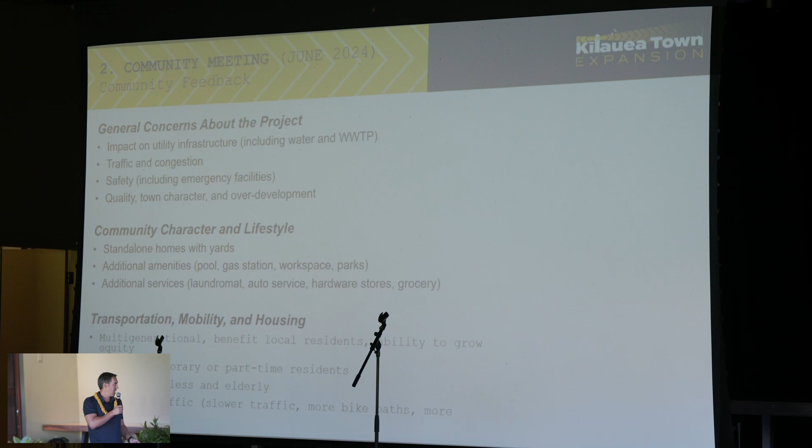So during the meetings, we always want to get some sort of feedback. Meeting number 1 was about getting a lot of feedback — what you guys wanted, what your vision was, so we could start developing concept plans. Some of the notes that came out of those comments are as follows: general concerns about infrastructure — water, wastewater, traffic, safety, and the character of the community. You want the community's character preserved, so whatever is built has to still fit with what's existing. And the last one, of course, transportation and mobility — multi-generational, how to get around without driving, walking, biking, improving traffic, slowing driving down, allowing for better pedestrian and multi-use access.

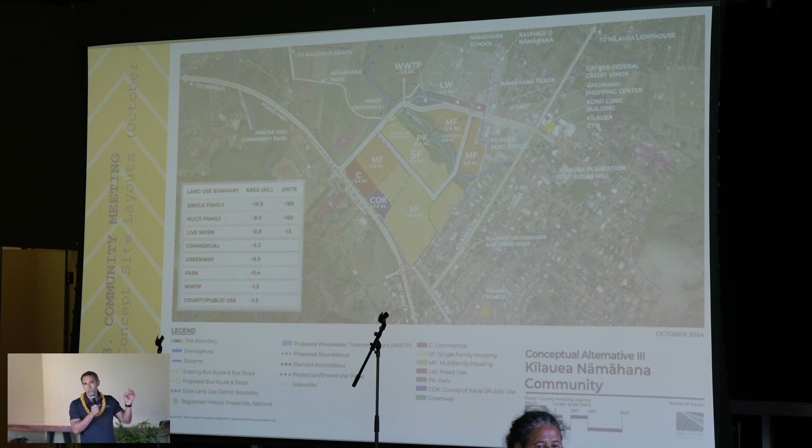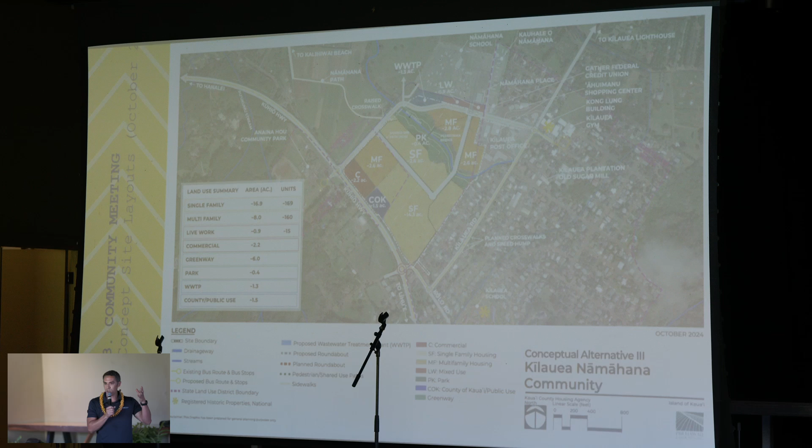There was a lot of feedback on these plans. Particularly, no one really liked commercial or light industry along the highway—they wanted it more focused towards the central core. That was worked out. The treatment plant, again, the concern was proximity to the school, proximity to residents and multifamily, and wind direction. So that was worked out.

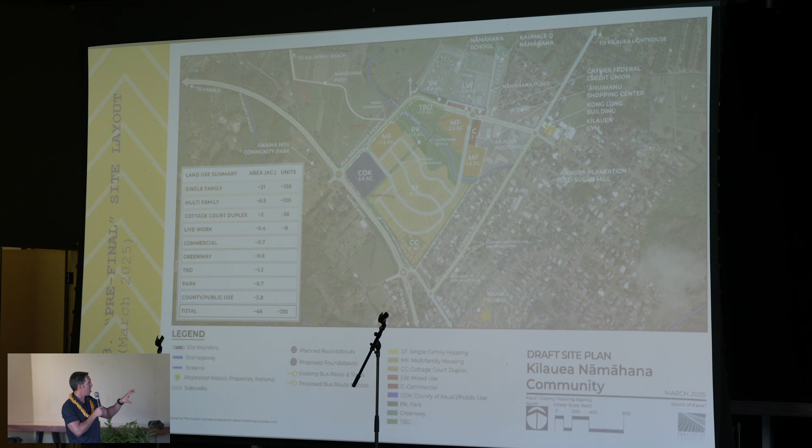Last meeting, in March, the county was saying it could be potential to site the wastewater treatment plant there, and if space allowed, a potential fire station. We'll present on that a little bit later. So this was from March, and again, not too much has changed.

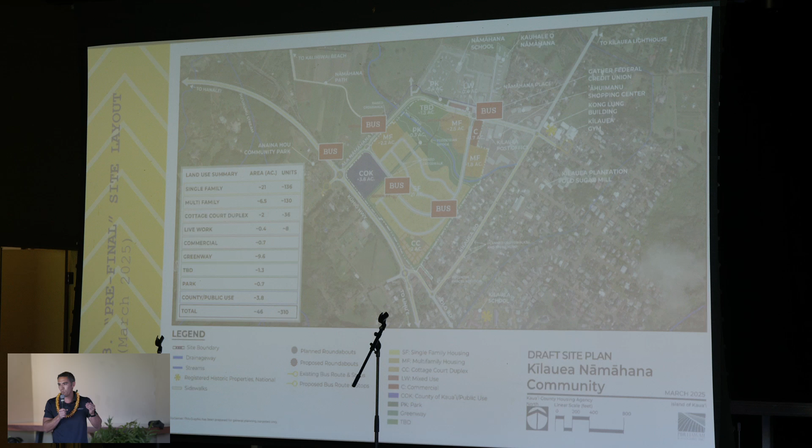We just want to bring us up to speed a little bit as to what was discussed to get feedback from you guys and what it came out to be. There was a need, a demand, for bus stops, so these were bus stops we're hoping to integrate. We'll show those exact spots, which are still options being discussed with DOT and the county to see how it all works out, but bus stops were something that were included, and it's more fixed on our current plan.

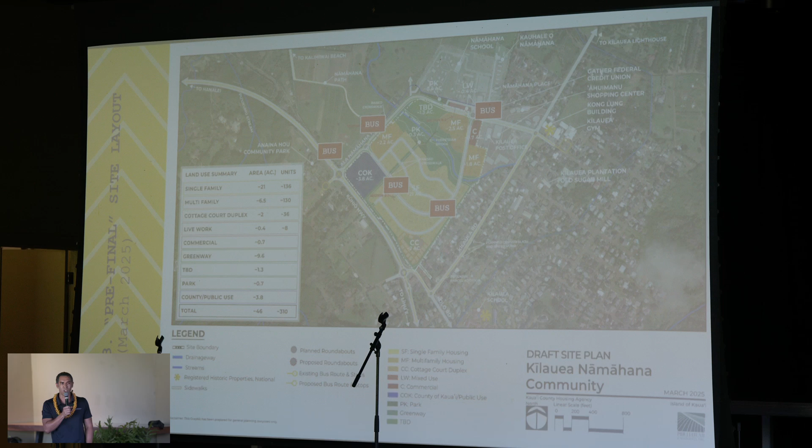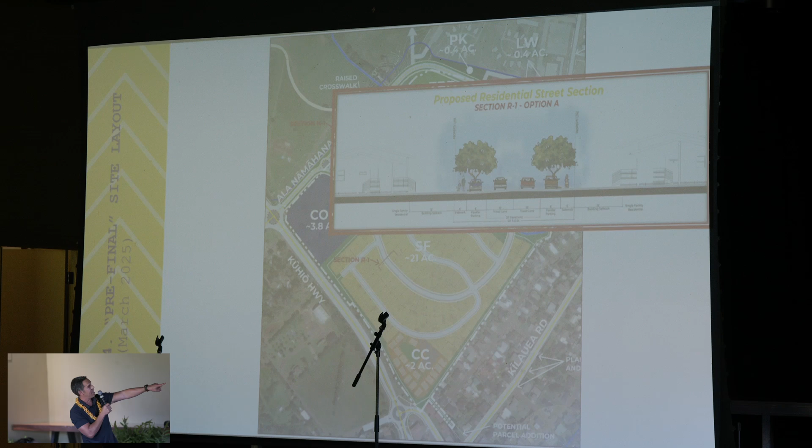So this is a look at the residential, inside the yellow where the single family housing is. There were two options proposed: Option A, traditional curb and gutter with parking, and one with the grass swale, which is more similar to what is currently in Kīlauea Town.

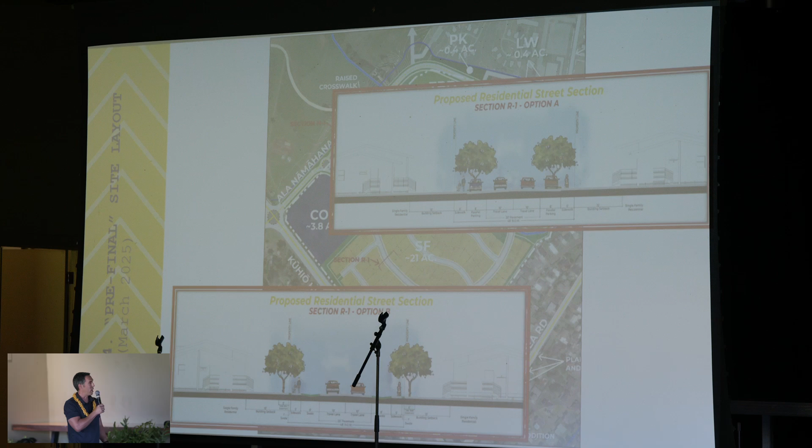So you see the two options: you have parking in the upper right option with the curb and gutter, and there's no parking in the grass swales. So you sort of lose that parking, but you have that grass swale which sort of matches what's currently in town. I'll just tell you the feedback on this was mixed—half the people wanted grass swales, half wanted curb and gutter, and there was a lot of back and forth as to why. We'll present what came out of that a little bit later on.

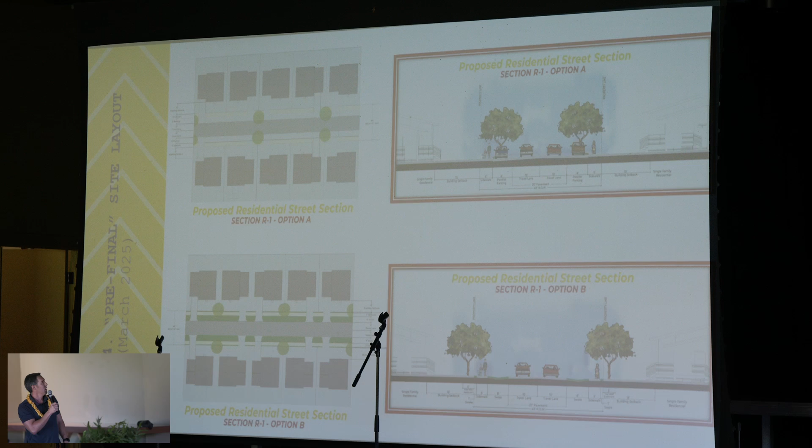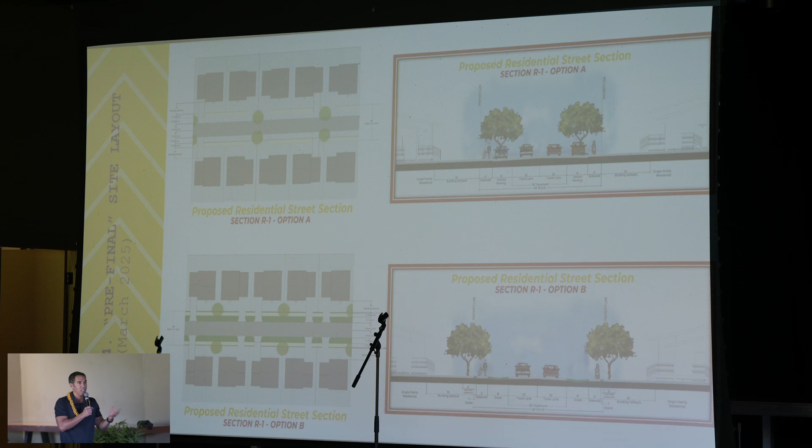So this is another look at it, just so you can see a little more visually. The top one is the curb and gutter, allowing for cars to park within the residential areas along the side, versus the lower option with the grass swales where there is no parking. Some of the concerns the Kauaʻi design team had was if you have the grass swale option, we know a lot of people have extra cars, they're likely to use that area for parking anyway, which rules out the real purpose of the grass swale. When it rains, they go muddy and all messed up.

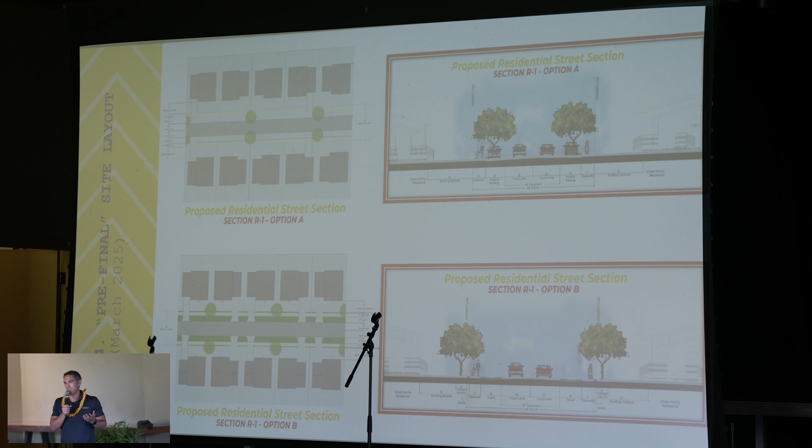So a lot of back and forth. Again, it's very mixed opinions as to what the community wanted for these areas.

Next slide. Okay, so that was a very quick synopsis of the past 3 meetings, right? There were 3 meetings, 3 different times where we received feedback and asked questions. You guys gave us your comments, which we're always open to. There will be a slide towards the end where if you're not on our mailing list, sign up, so you can email us and contact us directly. There's the county site where you can see all this past stuff - the design files, as well as presentations, as well as the recording of the presentation. And sometimes we even put up the questions and feedback summaries, so you can read through what people asked and what people responded.

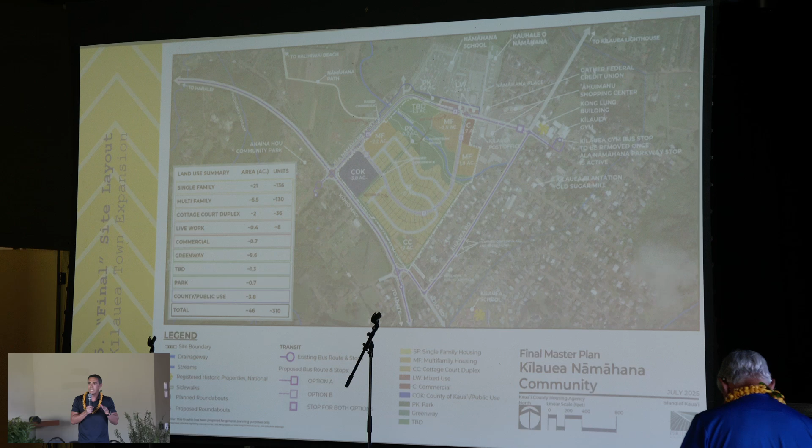So I'm going to turn it over to Will from Engineering to go over the technical side of the current master plan. You'll notice it does say final master plan. This is final in the sense that we need to draw a line in the sand so we can complete all the rest of the studies - environmental assessment, zoning. Can we count all those areas and units to stay exactly as they are? Probably not, it's going to shift a little bit, but this is the working model that's going to be taking us through environmental assessments and all the zoning and everything.

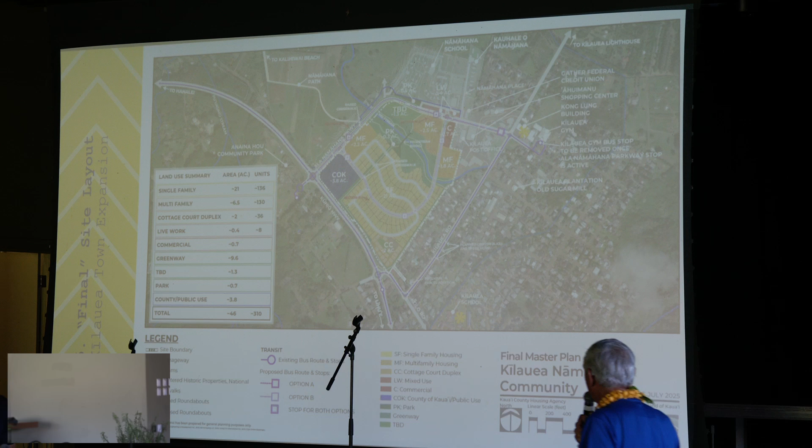So, thank you, Will. By the way, Will is my son.

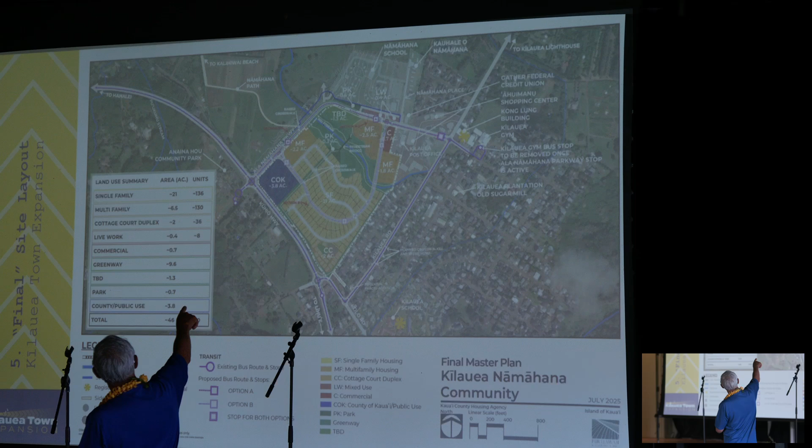To recap, we have some roundabouts. You see roundabouts at the school entrance and the spine road, interior road. It comes through and ties into the other side of the Kīlauea Highway. So there are 2 roundabouts there, and the 3rd roundabout at the intersection of the Kīlauea Highway and Anaina.

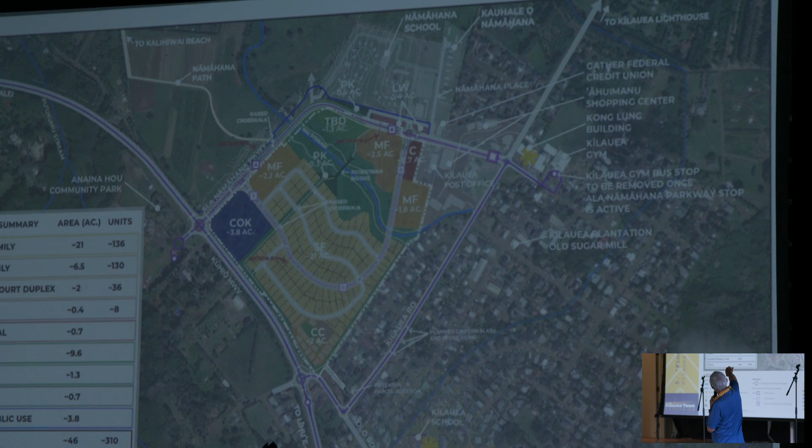And those are the houses. Someone asked me about - well, single family right there, so look at the table there, those are the number of single family units, approximately 136, multi-family number 130, so almost a 50 split. The court is the CC, you see on the lower right-hand corner of the parcel, and then the live-work units there, so a total of 310 units.

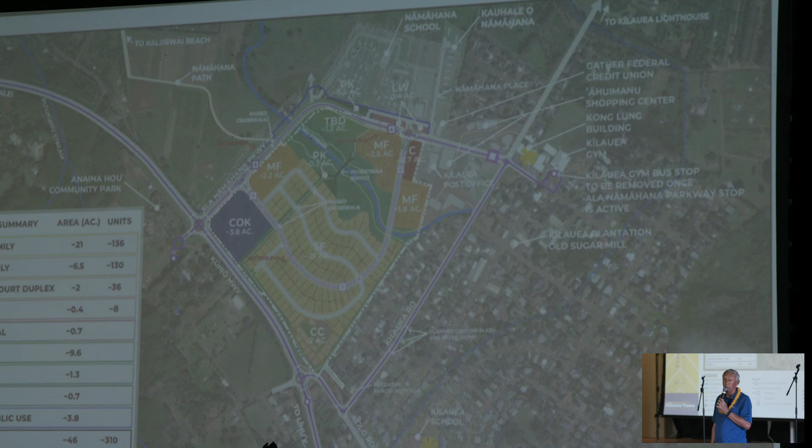You see that there's a drainage area, the green belt area, there's a stream that just went through. We're keeping it natural. Now we're working with public works right now. You see other developments address drainage, and maybe developments have detention basins - you know what that is, right? It's a big hole in the ground, it's grass, and it catches the water, its overflow pushes it out. So that's the typical option.

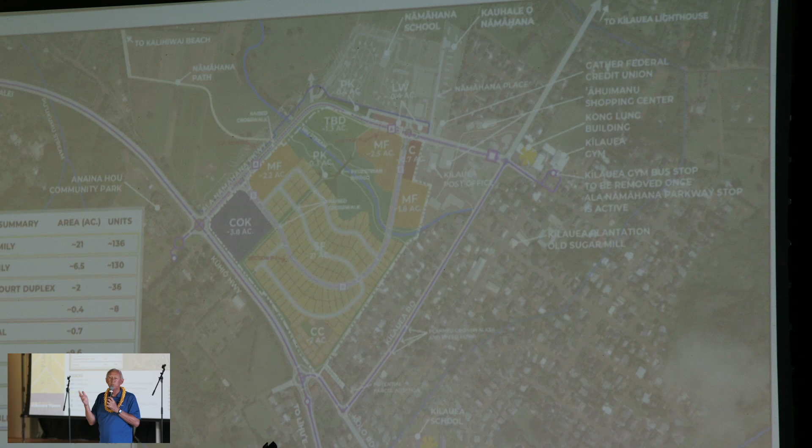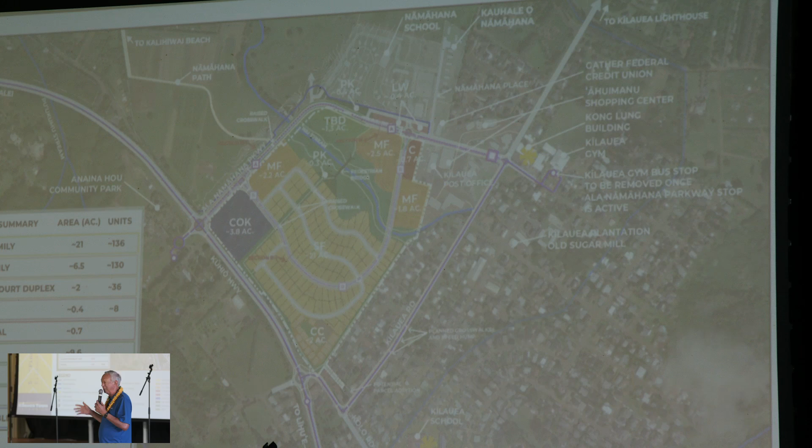With the last month or two, it's pretty overgrown. Kind of hard to walk through there, so some work needs to be done to improve it and maintain it, and that's for the future. But I just want to get some ideas.

Any questions about that? Let me go through it and then we'll open it up for questions. Next slide, please. Sure, can you go back?

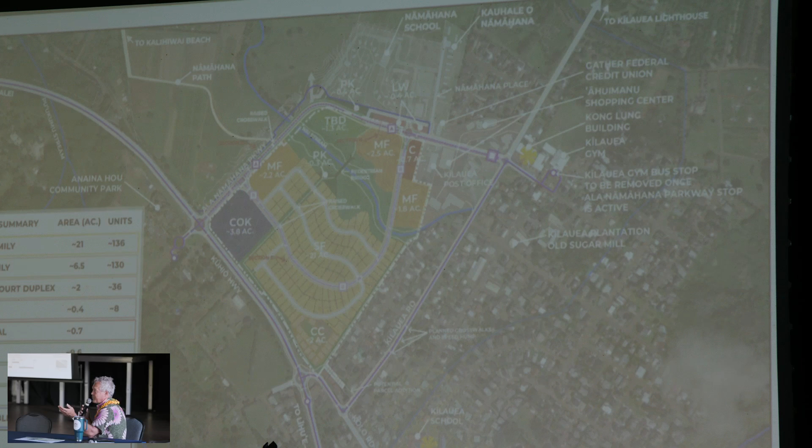As Bill mentioned, just to clarify, in discussions with the Department of Transportation, they recommended two different possible bus routes. Option A would run along Ala Namahana Parkway, represented by those bus stops. Option B would go through the internal part of the town along that curvy loop road. From the Department of Transportation's perspective, it's one or the other, not both. So we very much want to get your feedback on the community's preference for the route of the bus and the future stops. We really do want everybody to comment on their preference.

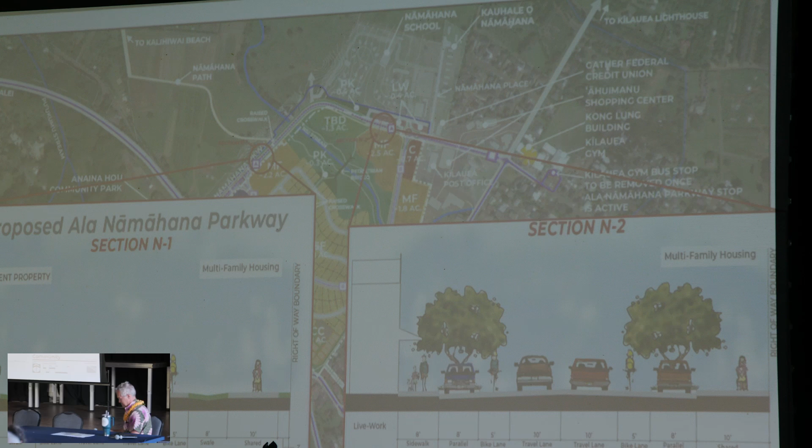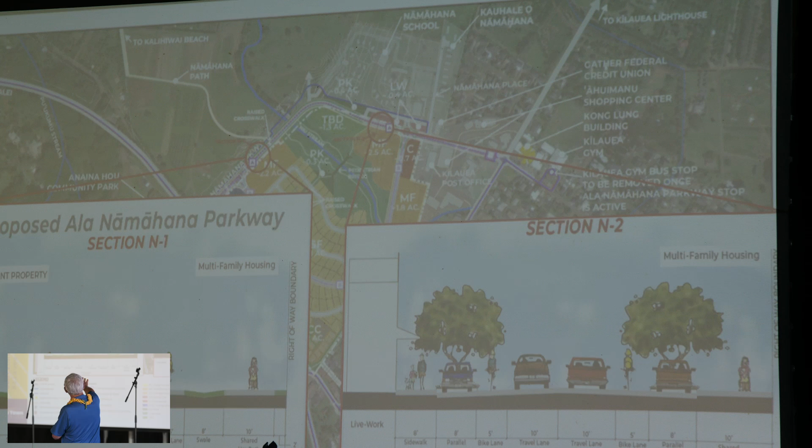Thank you, can you go to the next slide? So this is what we finally came up with. On the Parkway on the left, we're going to have a combination of grass areas - it's hard to see on the slide here - and on the right we have curb and gutter.

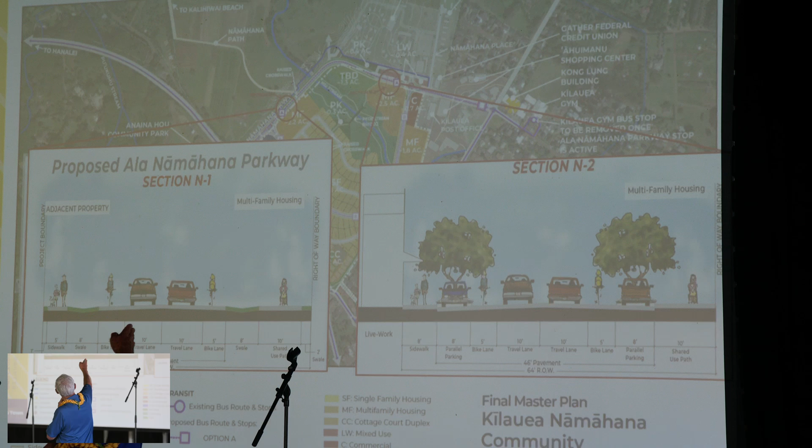Essentially what we're going to do is have curb and gutter come from the commercial area, the post office, with curb and gutter. We'll extend it through the live-work area. Makes sense, right? Because it's commercial.

And then from there - I'm sorry, we're not a pointer - but there's a green edging by the park, 0.7 acres, that will be a grass strip. We're trying to incorporate the rural look to it, so the middle portion will be grass swales.

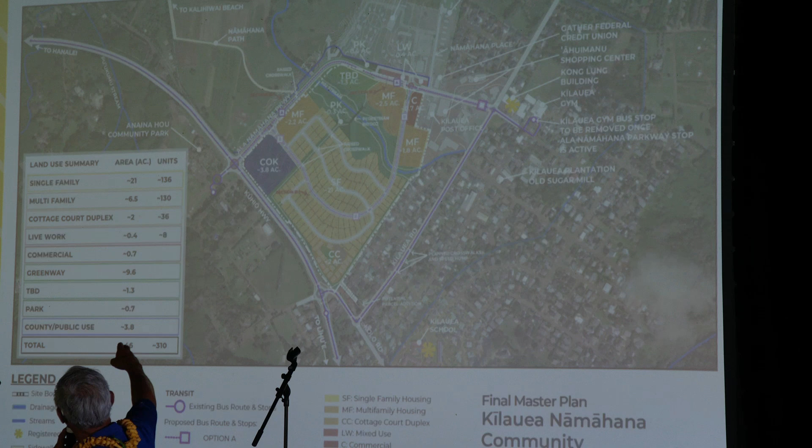Can you do a back view? Yeah, there you go. So as you come back to the second roundabout, closer to the intersection, we again will transition from swales to interface with the large roundabout at Kīlauea. So that kind of makes sense, right?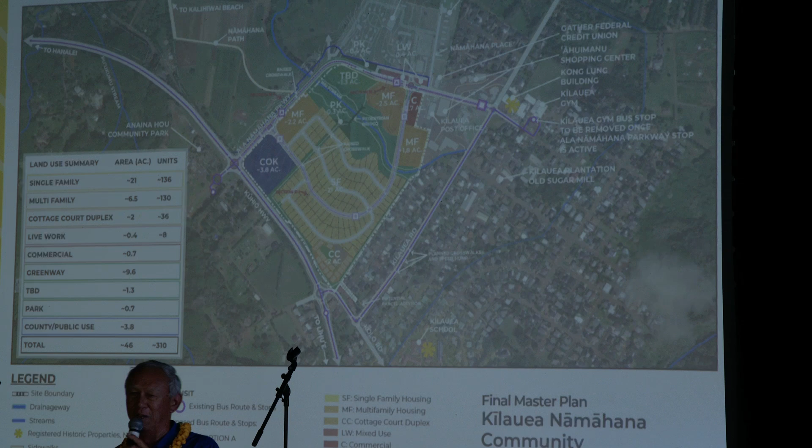We're incorporating a little bit of urban design where there's need for it, and for roundabouts you do need curbs - you don't want people jumping the curb and going around illegally, right? So anyway, that's the general plan for that. Let's move forward.

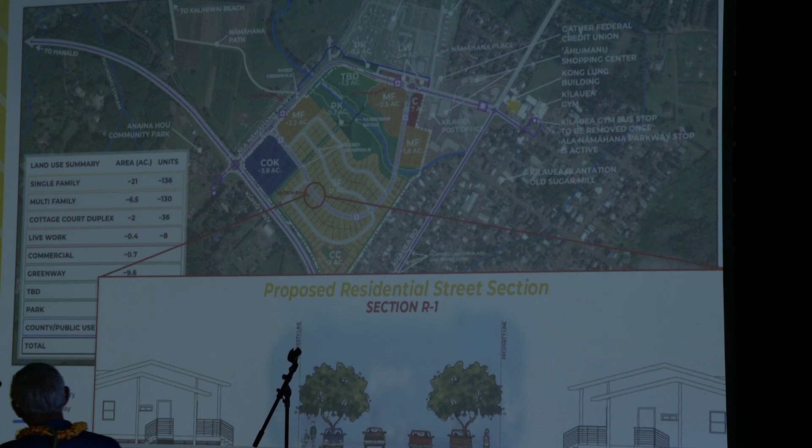Next slide. So for the internal roads, what we've heard and what we're recommending is that for the spline road, where that circle is, we will have curb and gutter. This is the section we're going to use for the interior roads.

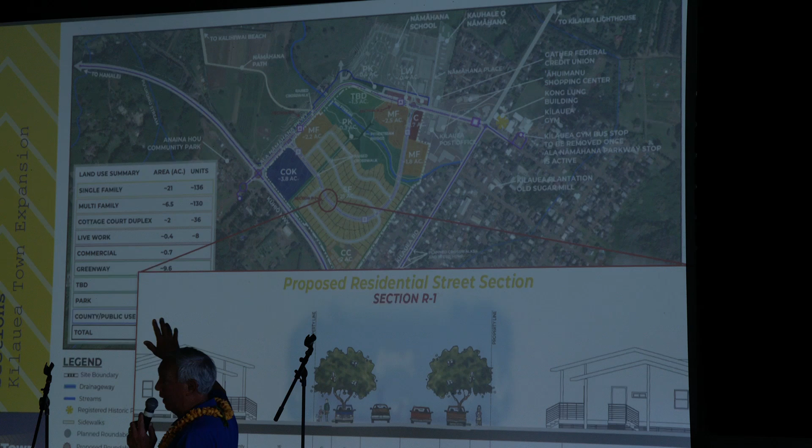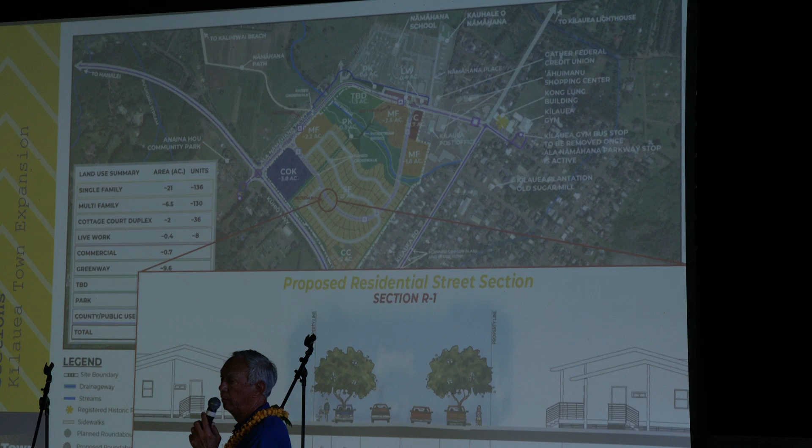The jury's still out on that - you can have grass swales, more rural, or you go with this. I think you kind of want more of a rural look on the interior, but at this point, the main spline road that bisects the site will be this configuration with parking allowed. So no grass swales in this area, but in the interior you will have it. Moving on to the next slide.

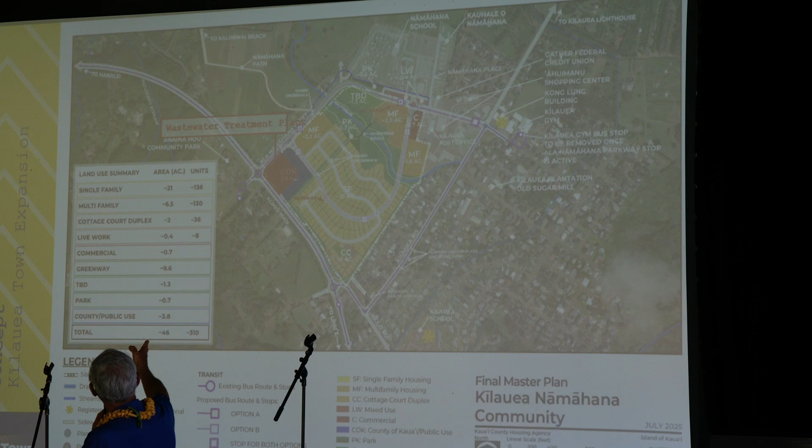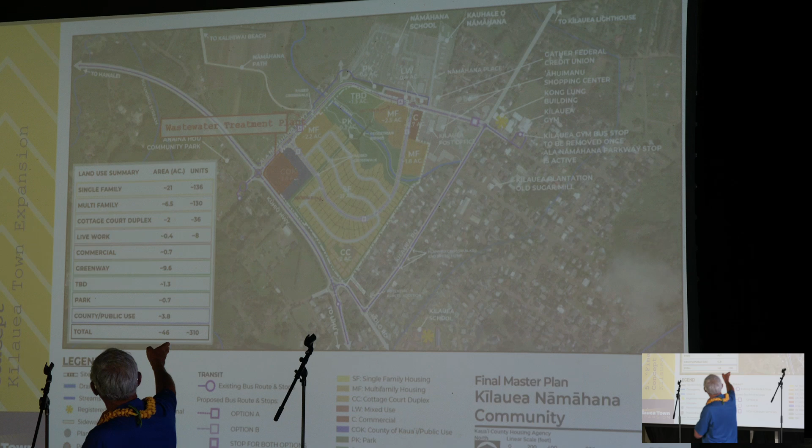Okay, this slide - you remember the county site, the 3.8 acres - the wastewater treatment plant will take up that corner, about 2.3 acres. You can see the blue area around it is a buffer. The blue area just to the right, between the treatment plant and the subdivision, that's wide - about 150 feet or so, wide enough for a possible fire station.

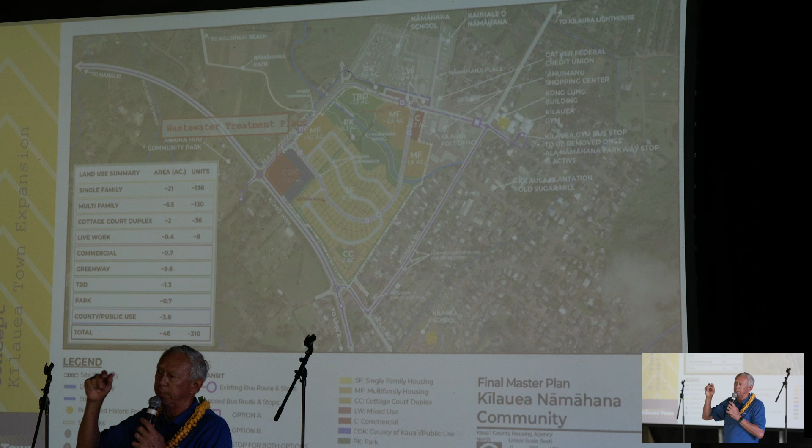I'm working on the fire station right now on the civil side - that site there is large enough. So there's a buffer around this plant, just want to point that out to you.

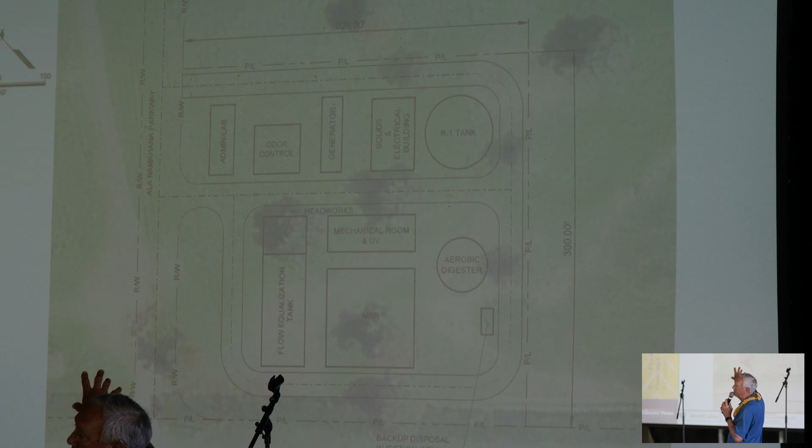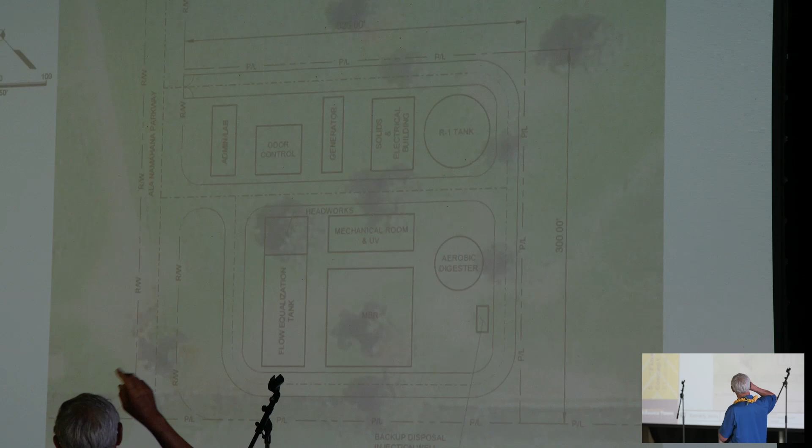Next slide, please. So this is - I don't know how many you planned - but that area you showed, this is the box diagram of what the treatment plant will be. It will be built modularly, because obviously you don't have 300 homes coming on all at once, so that will be built incrementally. I won't go over this in detail, but you have flow equalization tanks, various reactors, UV treatment, and aerobic digesters, and so forth. This is the site that we have for the treatment plant. Next slide, please.

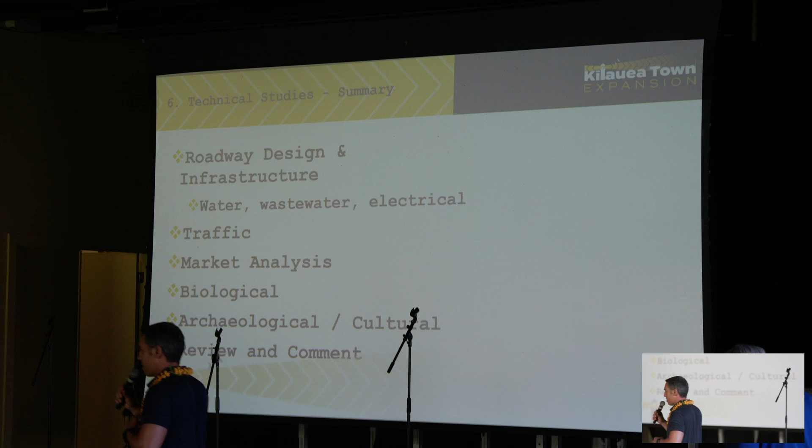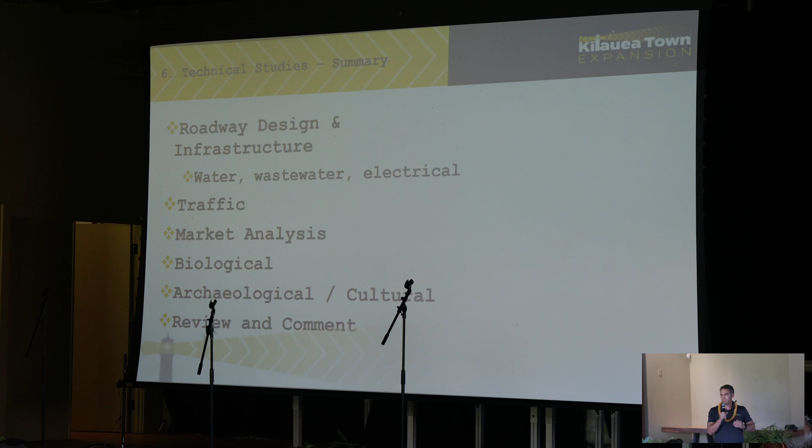Regarding technical studies, remember we're trying to lock in something so we can finish up the technical studies and allow us to do the rest of the analysis on the site. Roadway design and infrastructure all along the parkway is the priority that has to be built and constructed first. Utilities have to run in that corridor in order for everything to work. So that is the priority.

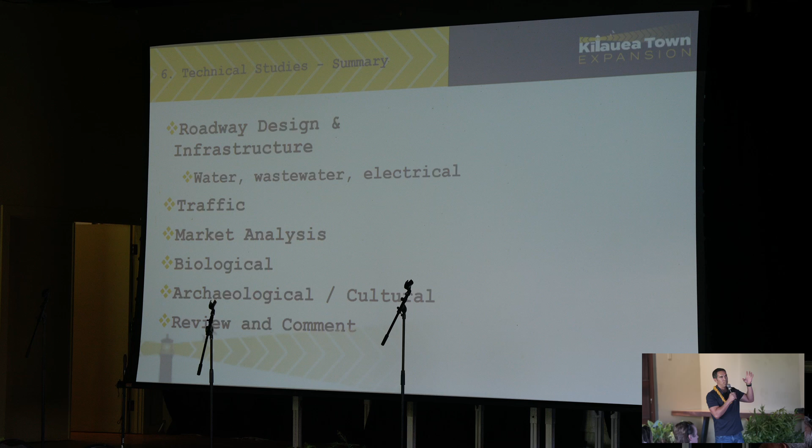Traffic studies, market analysis, the biological, archaeological, and cultural studies are, I would say, greater than 90% complete, based on the plans and modifications that have come out. Some of the results of the traffic and market study have been used to determine what the density might be, and where the roundabout should go. Even though a lot of your comments matched those results, that's good, because it confirmed what the analysis showed. Those background studies confirm and allow us to justify why things are going to be the way they are. We're reviewing and commenting on the finals of these as they come through.

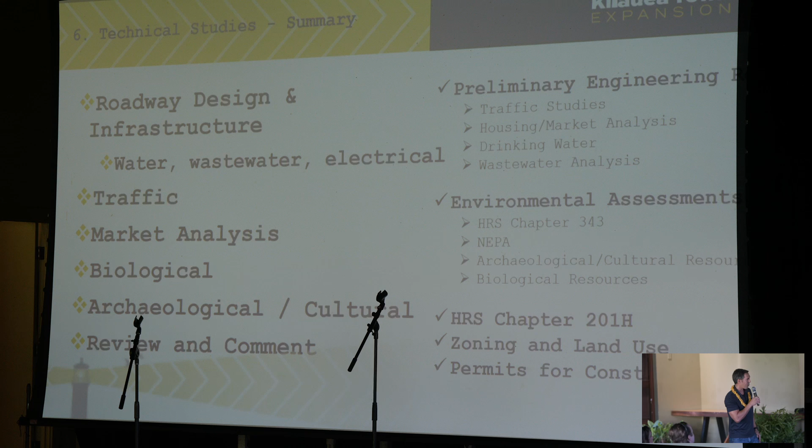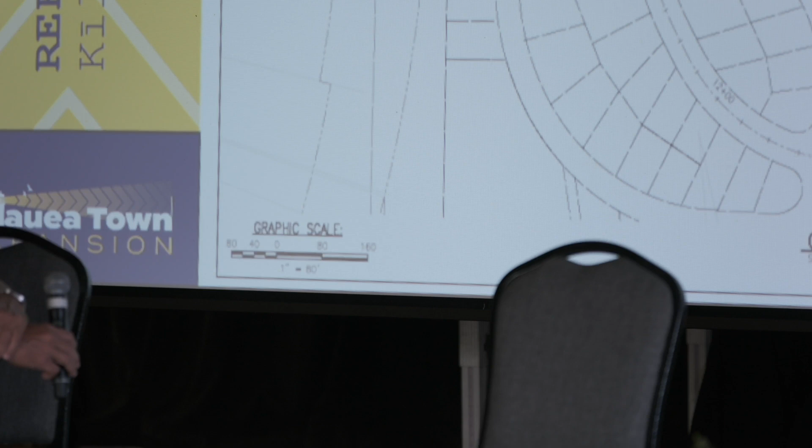So this is one of the schemes we're working with, basically an actual detention basin. I'll try to bring it down to layman's terms: the roadway is designed for a 100-year storm. This is the ponding area for that 100-year storm, which eventually goes under. You see the double culverts there, it's a triple barrel culvert with a small culvert at the lower level that will always allow water to go through, but we have to control the water. We don't want a big gush. So this design will retain some of the water, and then it will eventually go through.

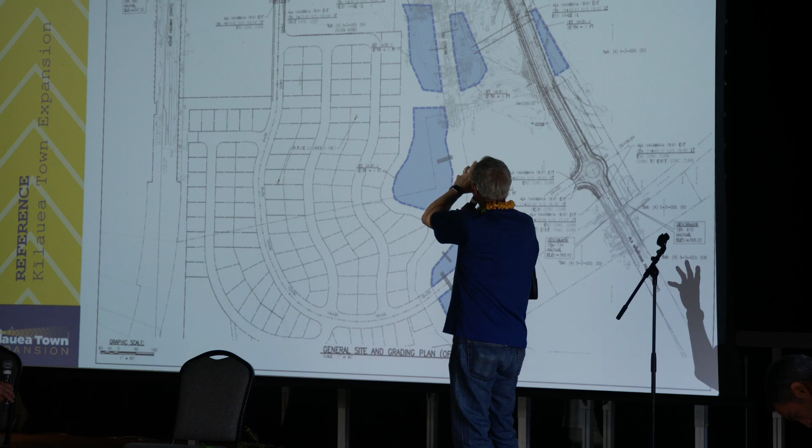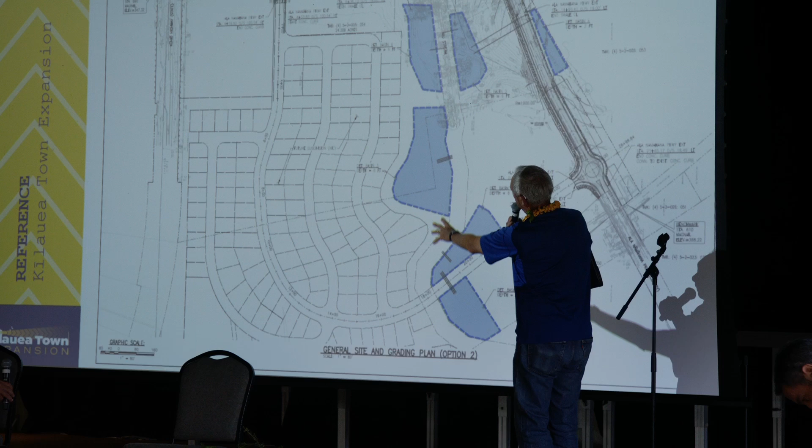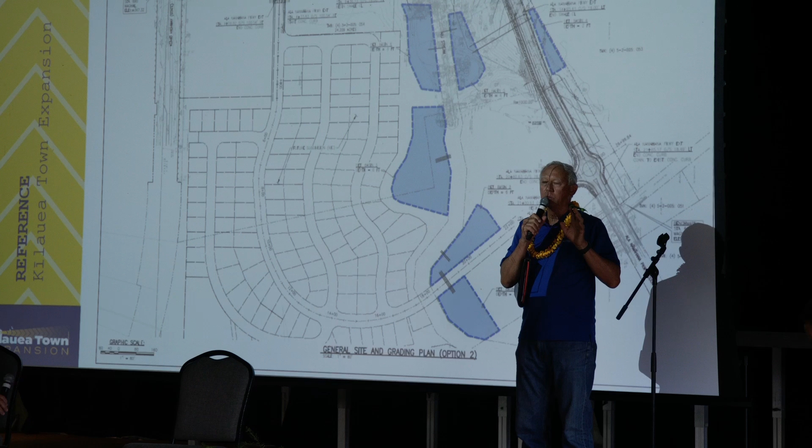If you go to the slide, this is your standard detention basin that you see all over. This is the approximate size of the detention basin we have, to bring the runoff into the stream to pre-development levels. You may have heard that, right? We're not allowed to increase the runoff into the stream, so we have to store it or retain it and allow it to release. So when I mentioned that to you verbally, that's what we were talking about.

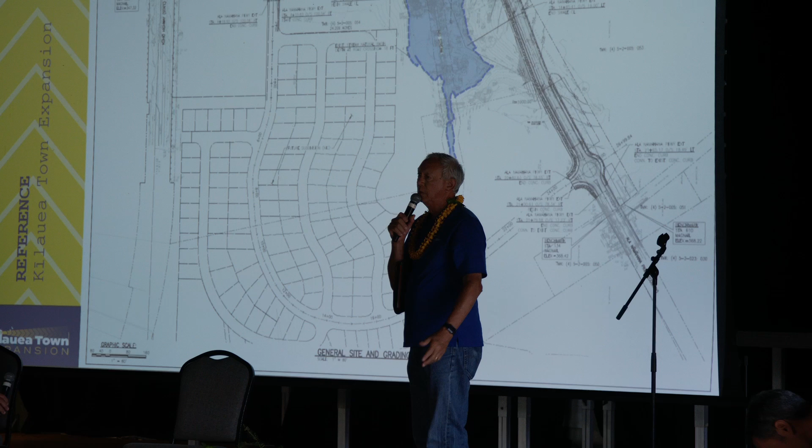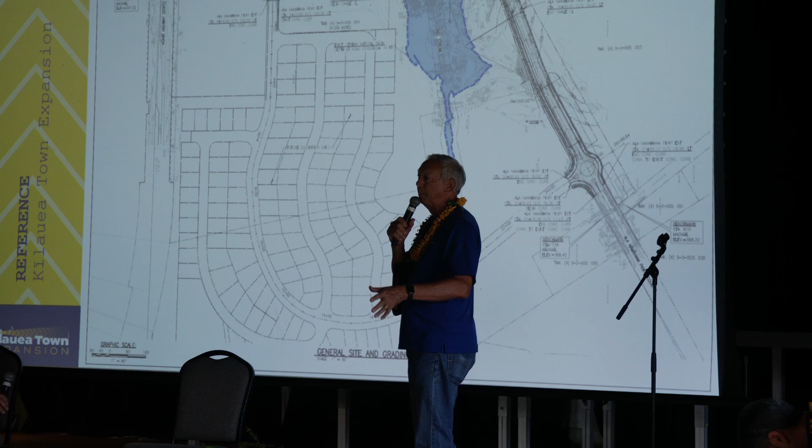So I prefer the other scheme, the initial one, the back one. This has less impact, but maybe it's out-of-the-box thinking. There are no regulations for this currently, so we're working very closely with Public Works to ensure the safety of the people and environmental protection. So that's it.

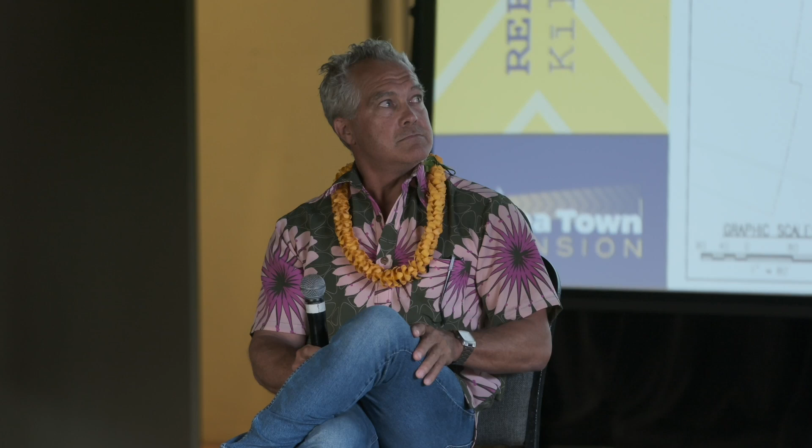So we had that preliminary discussion with Public Works, and there's a lot of detail involved because there are other regulations regarding this. We're treading on virgin territory now, but I think it's for the better.

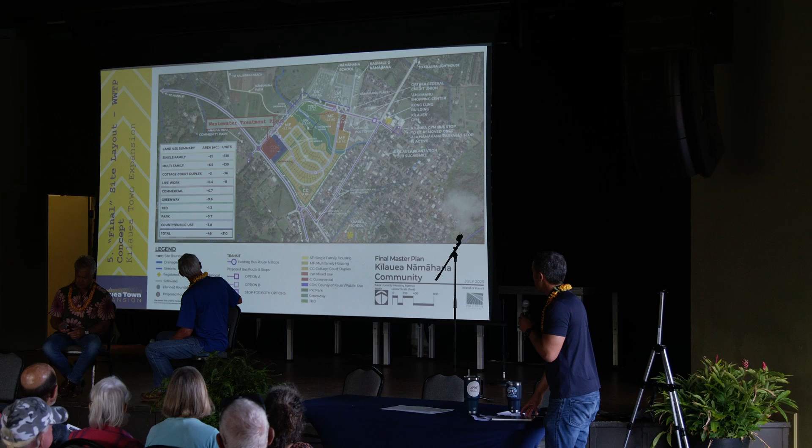So the 2006 town plan called for both more commercial and light industrial space in this expansion area. In our first community meetings, from comments received, there was a decided lack of enthusiasm for light industrial space adjacent to this new residential community, but there was interest in commercial spaces serving the local community. So, light pollution...

As a resident of Kīlauea, being able to look up and see the stars is very important to me. So along the streets, in the commercial areas, I think we are required these days to use very low intensity lights for seabird safety. I think we would do that anyway. We're required by law under a consent decree covering the entire island of Kauaʻi for seabird protection, so there should be very low level street lights to the extent there are any.

Commercial areas would have the same hours of operation requirements as existing commercial activities in Kīlauea. As far as the commercial space goes, the county is working to create these spaces to benefit the community, not to make money.

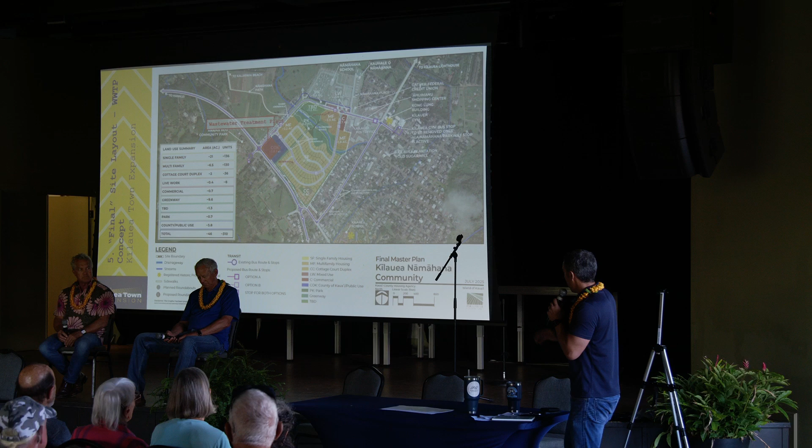Separate from these community meetings, we have also had a separate round of meetings with a community advisory board of about 15 or 20 different folks with long ties to the community and members of the neighborhood association.

Taking the comments from the last meeting asking for more recreational facilities, we brought that conversation to the community advisory board. A preference was expressed that the neighborhood association has long wanted the existing Kīlauea gym area to be expanded and improved. There is potential neighboring land that could be acquired for the expansion of the existing recreation center, so rather than develop a whole new recreational center from scratch, we've left that out of this plan, with the hope that we can expand the existing area by the gym and additional ballparks.

This isn't going to happen tomorrow, but Anaina Hou School's intention is to have a gym and a swimming pool on their property. Understanding their long-term goals, that swimming pool would serve not just the school but the entire community, so it doesn't make sense for the housing agency to pursue building a swimming pool in this housing area. It'd be better for us to support the school in achieving those same goals already planned as part of the project.

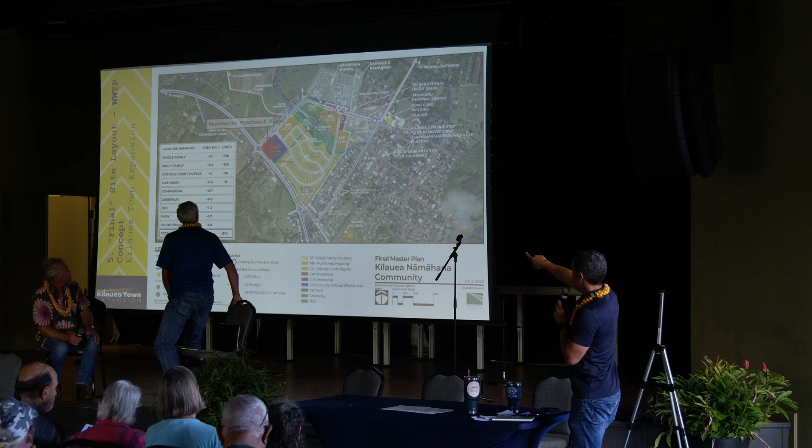Looking at the bus stops, there's a question about them, so let me add to this. Bus stop option A runs along the Parkway, the upper part, and option B runs along the interior, with stops 1, 2, and 3. Those are the two options currently in discussion, presented by the Kauaʻi Bus, or Kauaʻi County Department of Transportation, to get feedback from the community. In either option A or B, the bright purple square near the intersection of Kīlauea and Ala Nāmahana Parkway, that bus stop which has already been created, will be activated. Then we have the option of whether the bus travels only down the Parkway, stopping at the A's, or option B, coming through the neighborhood, stopping at the B's before going back out on the highway.

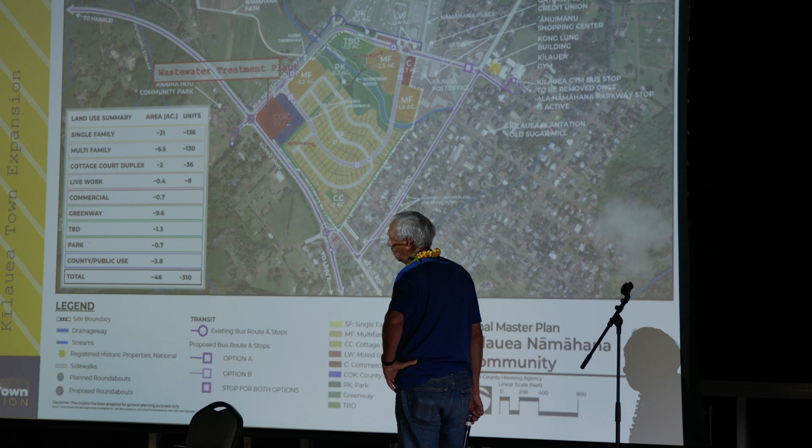It seems that the B's provide better service to the community, with bus stops closer to where everyone lives. The downside is that as it runs through the neighborhood, you have buses going every half hour through town. So there was concern expressed about the noise of buses driving through town every half hour, and whether that would be an acceptable trade-off to the community. Take a little more noise in exchange for more convenient bus stops, or keep the bus out on the Ala Nāmahana Parkway where noise is less of a consequence, but you have to walk further to get to the bus stop. So that's something we want your feedback on, which option do you prefer?

Okay, thank you. I think from my perspective, looking a little bit ahead, this is the kind of thing we might put out through the county site, through an email blast to people who are registered, to specifically get feedback and have people comment on something. I think some architectural renderings we want to bring out a little bit later on, we're not quite ready yet, but that came up in the question of what this will look like visually, homes and structures. So I think the bus routes and the structures might be something we put out a little bit later for feedback. As much as we want everyone to type in feedback right now on the bus stops, we do have time, but we will put something out in the next couple months on that.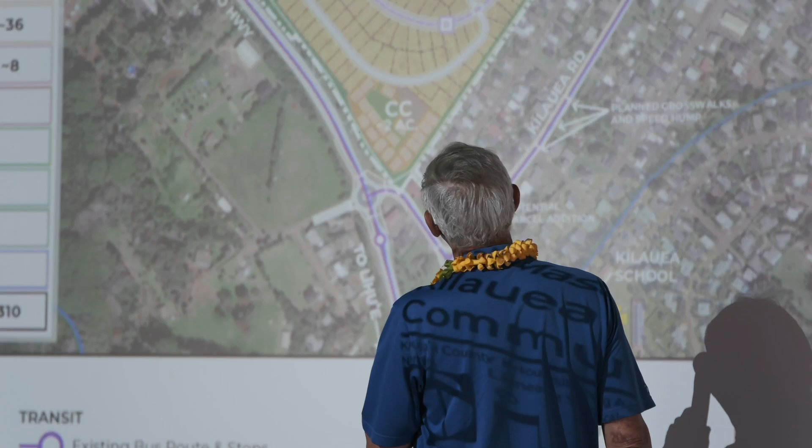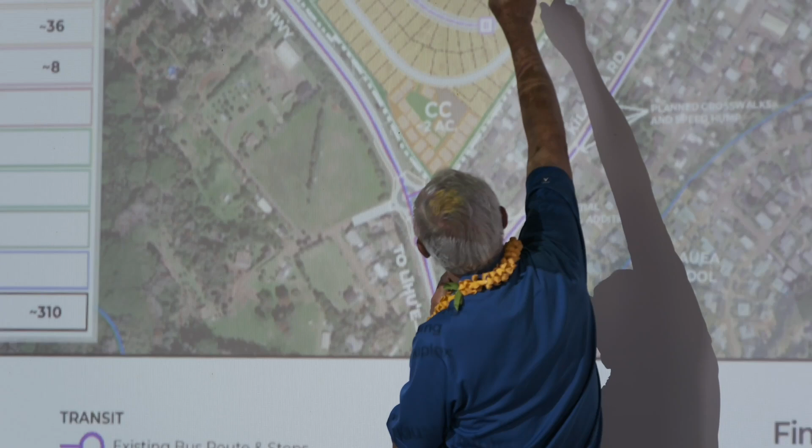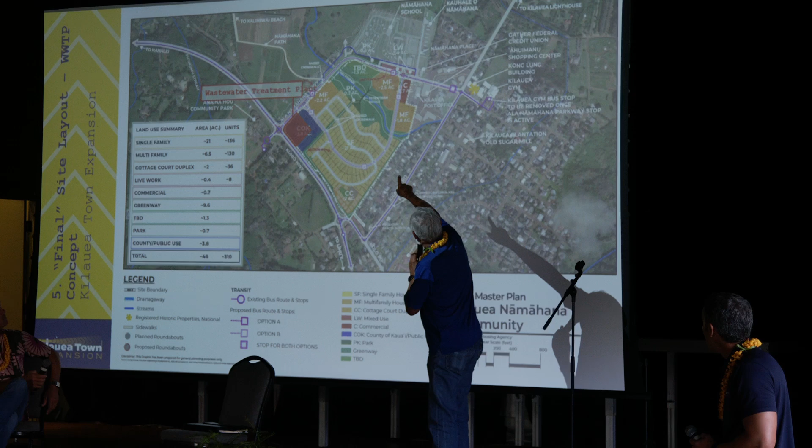So what our planners did was create a multi-use path for pedestrians and bikes. That's the green belt areas here, and along our proposal is to have a path across the street, and there will be bike paths along the roads too. So the green belt areas are the pedestrian and bike paths, and also along the roadway, so there are multiple ways of getting to and from schools.

I think even those lighter yellow areas are paths too, right? Right, paths, right. All the roads that go along the street, yeah. So those are all, I think, multi-use paths.

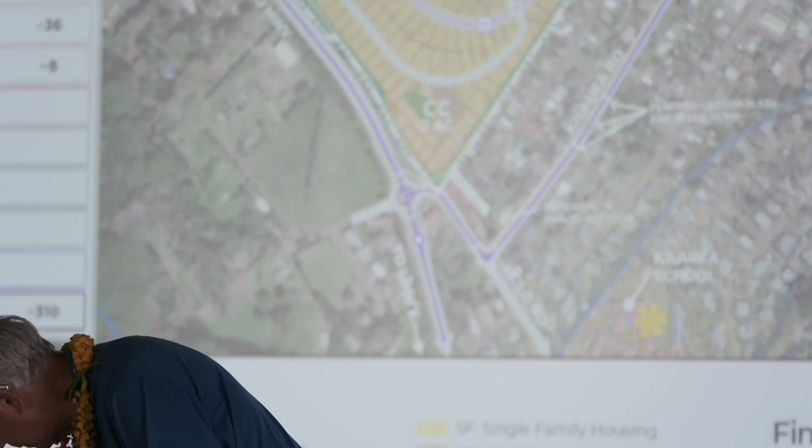So I think for safety for kids, I'd say the interior road into school for bikers is most safe because you have sidewalks, depending on the age. For people going more speed, like commuting adults, maybe along the parkway and the bike lanes is probably more appropriate. There's also a comment on the speed humps, lots of speed humps.

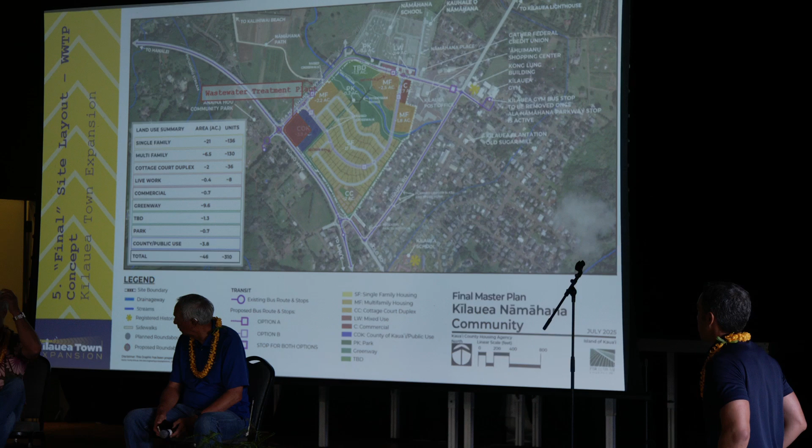Okay, let's see. That's it. Oh yeah, speed humps, there's a comment about the speed humps. They asked the question, why are there so many speed humps? And you know, I think there's a lot of crosswalks, raised crosswalks, right? So those are actually speed humps by design. What's the reason?

I don't think the raised crosswalk necessarily designates speed humps, but it has been something requested quite a bit through prior community meetings - speed humps or the flattened speed tables to reduce traffic, especially so we don't have people speeding along that curvy loop road through the community or along Anaina Hou Park. What were we originally thinking, Bill, for the Anaina Hou Park? Was it a 30 mile an hour speed limit? 25?

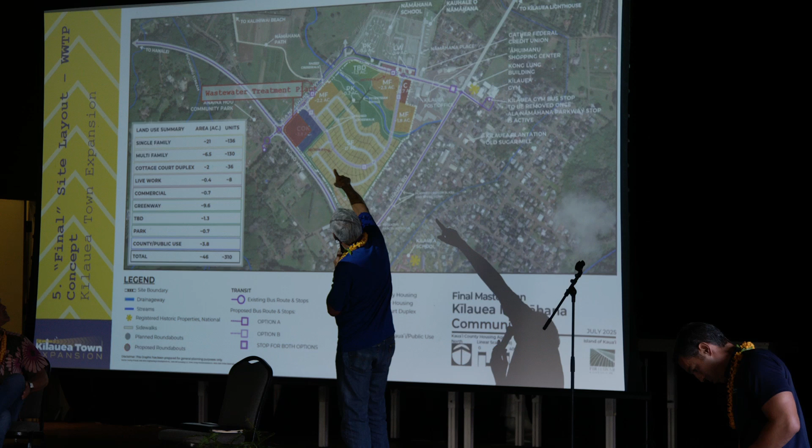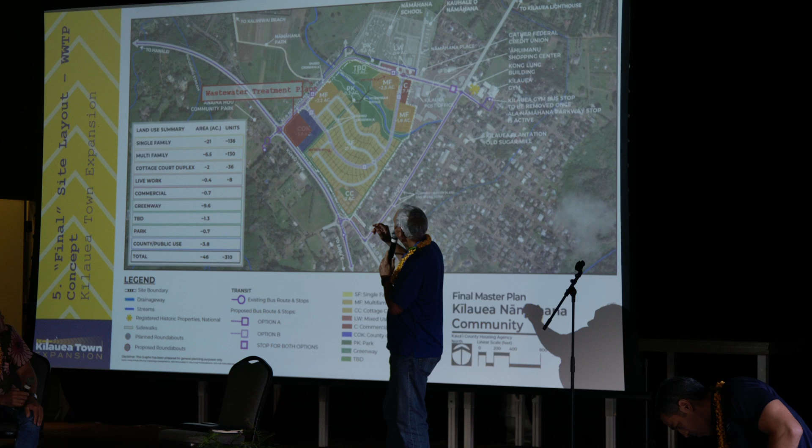We do have the roundabouts, which will be controlling the speed, but of course if you pick up speed along the curve there, you have to slow down to get to the next roundabout. But I guess a good point for a speed table might be that crosswalk that leads to the path, to the street, so that might bring down the velocity or speed through there. So it's a thought, and you're welcome to comment on that on the floor.

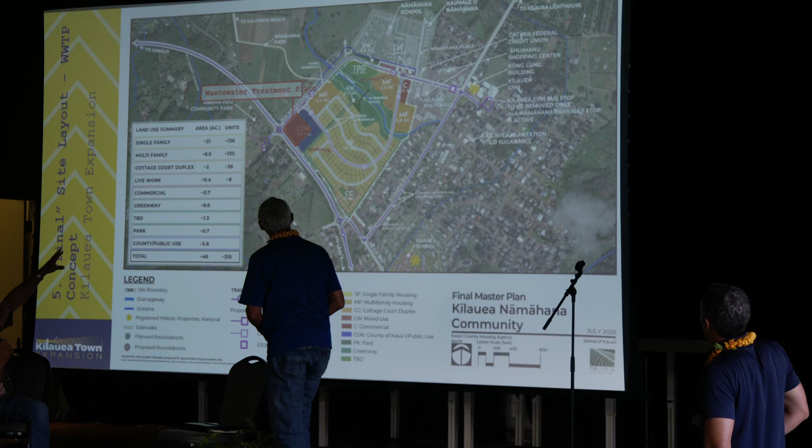Since Bill mentioned it, I want to highlight what's labeled as the Anaina path. It's been glossed over a little in some of the prior community meetings. As part of the roadway dedication I mentioned, happening at the county council on August 27th, the county is also going to receive ownership of that path, which will connect Kīlauea Town all the way to Kalihiwai Beach access, so you can ride your bike to the beach public access without everyone being on the highway.

That's also a question that came through. Yes, to add on that, that is included in the environmental assessment - the biological, archaeological, cultural studies - all being studied, so it will be a package deal with the policy. So thank you for that clarification.

Let's see, I don't know if it's too early to give a price point at which some of these lots might be available. It's going to take several years before any homes are built on this property, so I have no idea what the building costs will be then, but I can offer what the actual homes we're selling now are - we're building 3-bedroom homes in the Lima Ola subdivision.

For that project, we represented to the land use commission that all the homes in the entire subdivision would be for households earning 120% of area median income and below. It's our intention for this project to allow some homes to be at slightly higher levels, which is realistic for what the community earns here. But 120% homes currently being sold in Lima Ola are 3-bedroom, just under 1,200 square feet. There are 2 models: the less expensive one sells for $480,000, the slightly more expensive for $510,000. That's effectively the county's cost of construction, with the county eating all land and infrastructure costs to make lots possible, about $125,000 a house. So the county is subsidizing every one of those homes by about $125,000.

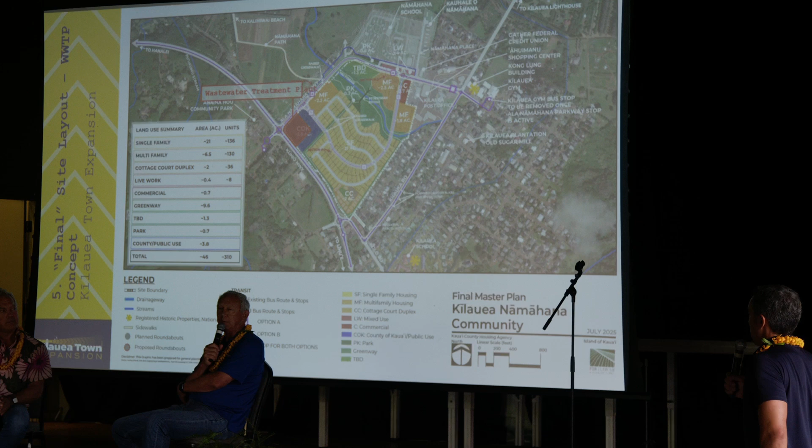So we're good. For the potential end, I'd say the Ala Nāmahana Parkway would take about a year and a half, maybe up to 2 years, because we have to build the Ala Nāmahana itself, which takes about a year and a half. On a separate track is the roundabout at the Kūhiō Highway, which is within the state highway's jurisdiction, so that will likely happen after we start construction on Ala Nāmahana itself. Then we bring on different areas of housing, whatever makes the most sense, whether it's the town core or other areas, constructing the homes accordingly.

Is that correct? Yeah, the intention, as you saw with the total number of units, is that this will all be built slowly over time. That was one of the things the 2006 master plan document called for when it asked for this project to be developed for affordable housing: that it be gradually brought to the community over time, as opposed to a massive influx of people appearing all at once. So this should be developed slowly over perhaps a 10-year period in different phases, not all at once.